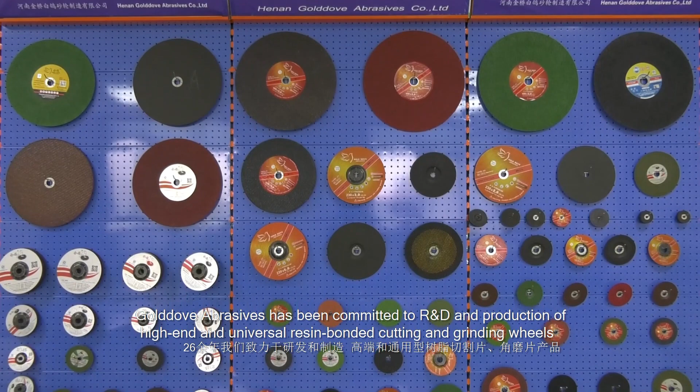Located in Henan, the manufacturing center of abrasive products in China, Golddove Abrasives has been committed to R&D and production of high-end and universal resin-bonded cutting and grinding wheels.

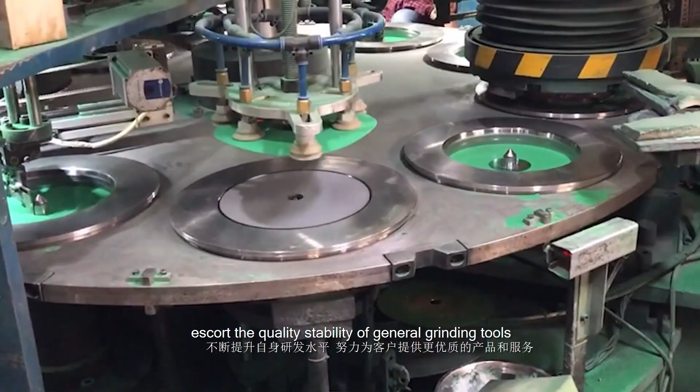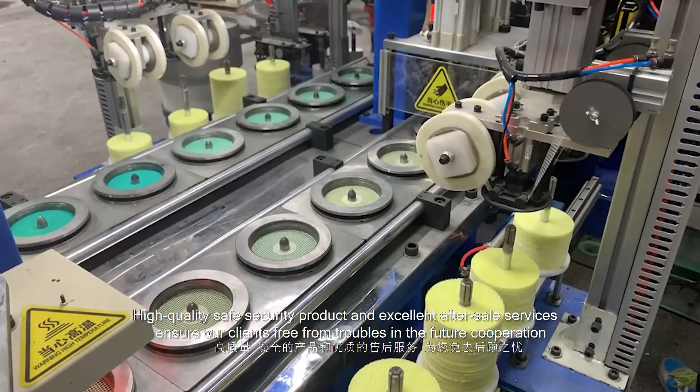Manufacturing experience of more than 26 years and continuously improving research have allowed us to provide better products and services. Quality stability of general grinding tools, high quality, safe products, and excellent after-sales services ensure our clients are free from trouble in future cooperation. Huge manufacturing capability enables us to shorten the production cycle and guarantee the fastest delivery.

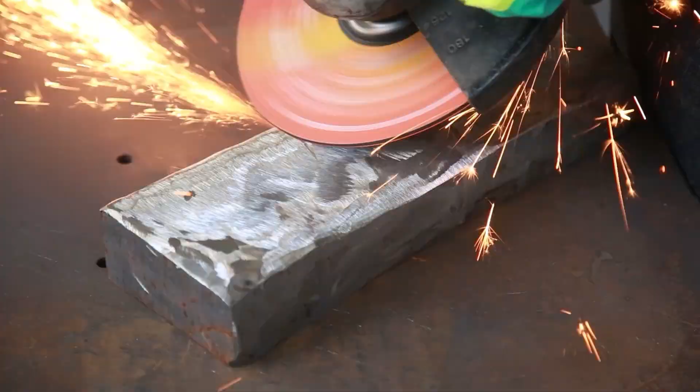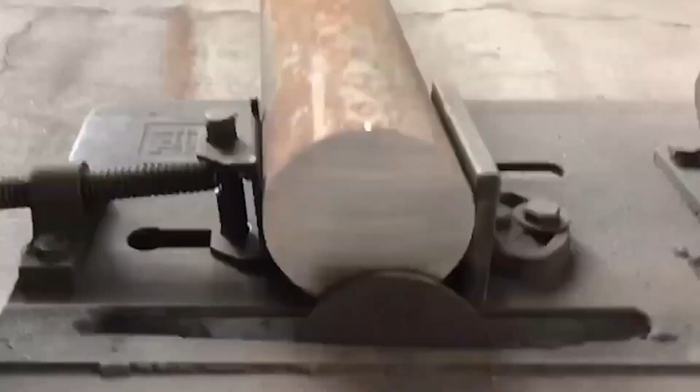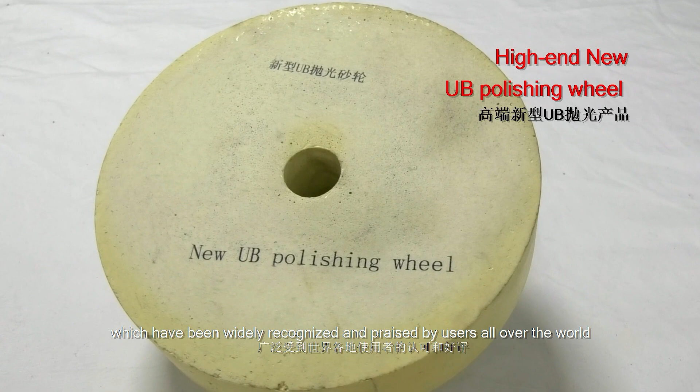More than 26 years of effort in improving product performance and expanding the application of high-end products enabled us to successfully develop specialized abrasive products for stainless steel, copper, aluminum, stone, and other materials, which have been widely recognized and praised by users all over the world.

More than 26 years of experience in export trading helped us accumulate market information on abrasive products from more than 40 countries and provide targeted products and customized services for you, providing products with a target price and quality, enhancing the overall market competitiveness of clients.

Cooperation brings us win-win benefits. Winning makes us stronger. Hand in hand with Golddove Abrasives, building our abrasive wheel empire together.

Okay, welcome back. I believe from the short video you have a general understanding of our company, and now I focus on the product itself. Here in this shelf display we can find the products we make for our own brand, Golddove Abrasives, and on the left and right sides we can find the OEM and ODM brands we make for our customers. I will start with Golddove Abrasives, our own brand.

Here we start from the bigger one. This one is a 16-inch cutting disc with double nets, and this one is a 14-inch cutting disc with double nets, double paper, and fully covered. Below, this is a 9-inch cutting and grinding disc, this is also a 9-inch grinding disc, and this one is a 9-inch cutting disc.

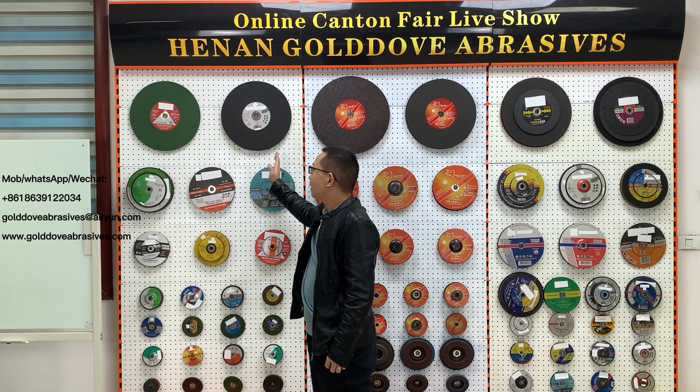On the left side, most of the sizes are similar to here, but these are OEM and ODM brands we make for our customers. Among them, some are for the Southeast Asia market and the Middle East market, different countries. And here are other markets, such as the African markets, the North and South American markets, and also the Eastern Europe market.

All we have here is just part of the brands we make for our customers. Actually, we export our products to almost 50 countries all over the world. So no matter if it's the Southeast Asia market, the Middle East countries, African markets, the Europe market, or the North America and South America markets.

Whichever market you're from, we can make it for you. It's no problem because we have full experience with this. Our factory has almost 30 years of experience in the abrasives industry. So if you have any interest or demand for products, you can just come to us, okay?

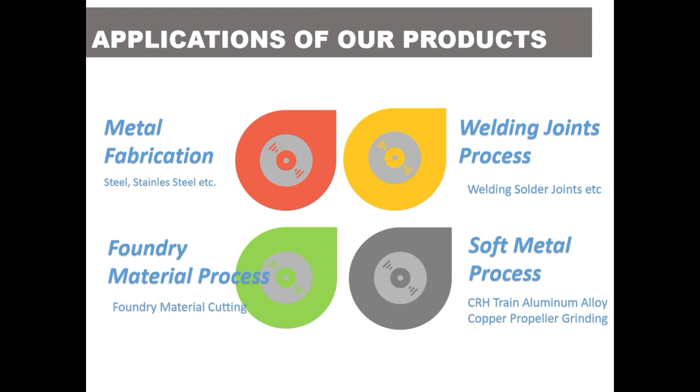Then I will talk about the foundry material process. It's mainly used with the 16-inch cutting disc. And then I will talk about soft metal processing, such as aluminum alloy and copper propeller grinding. I take 2 examples, the CRH train and the copper propeller grinding. First, I talk about metal fabrication.

As you can see at the front, there are different kinds of metal and steel, twisted steel and solid steel. Below, we can find stainless steel, different kinds: stainless solid steel, stainless steel pipe, and other materials. In a word, the abrasive cutting wheel can be used for the fabrication of steel, stainless steel, etc. This is the normal use of the product.

Here we have the welding solder joints process. After welding, we get the welding solder joints, no matter if it's steel or aluminum alloy solder joints. Then we grind with the grinding wheel. The main advantage of our grinding wheel is that when we grind the welding solder joints, there are no burns on the material, and it gives fast and long-life grinding.

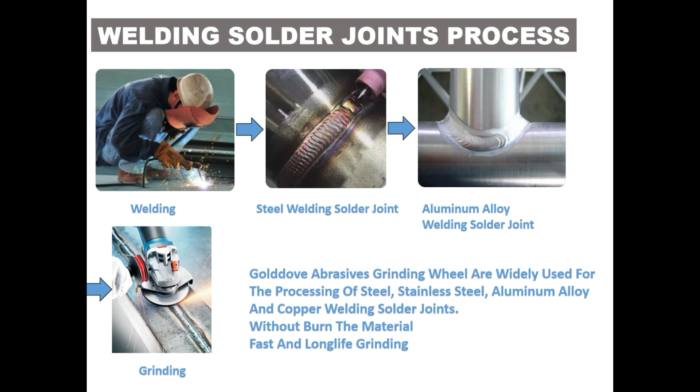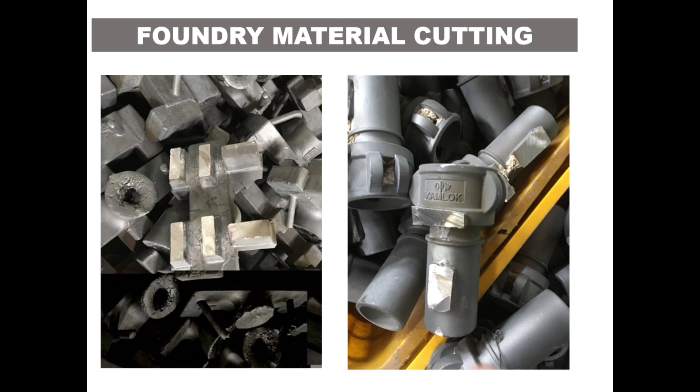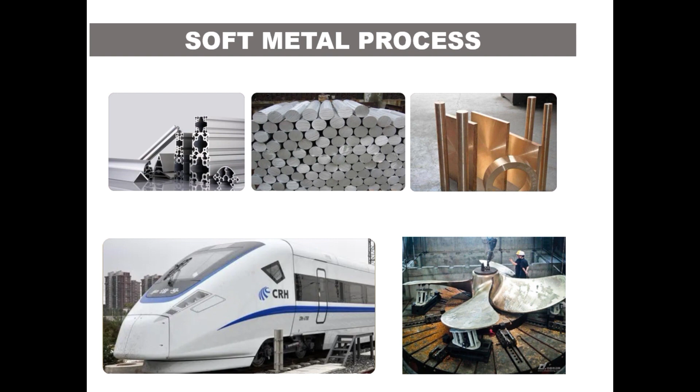Here we can find soft metal processing. This is aluminum alloy material, aluminum solid material, and this is copper material, different kinds of copper. Below we can find the CRH train. The main material of this train is aluminum alloy, so they used our cutting disc and grinding disc to process the aluminum alloy. And here is the copper propeller material, used for boat propellers.

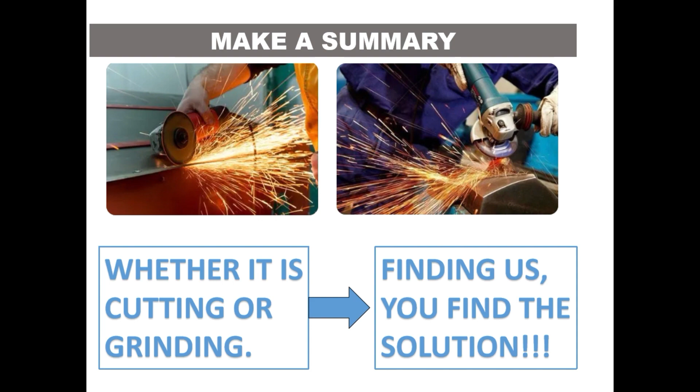So let us make a summary of my PowerPoint: whether it is for cutting or grinding, come to us and you'll find the solution for your product. Okay, my friends, welcome back. So much about the product introduction, okay? I believe every customer who wants to do business with us wants to know the product itself.

You must also want to know about our factory, about our production line, about our quality control system, and also the experiment and the packing process, all of it. Later I will show you around our factory. Me and Daisy will show you around, and you can see our production line. You can see our fully automatic, advanced manufacturing equipment, the baking process and packing process, and also we can see the performance of the experiment in our experiment room. Okay, let's go.

All these are the production equipment of cutting and grinding wheels. Some are semi-automated machines and some are fully automated ones. Each year we upgrade the equipment to improve the performance and save labor costs. If you have visited an abrasive wheel factory before, you must be very familiar with the whole process. Here I will give a brief introduction.

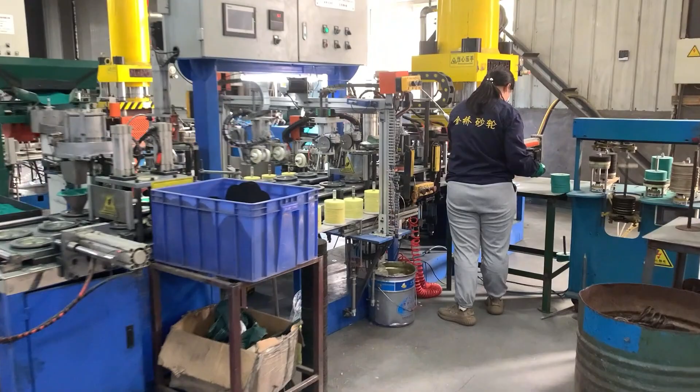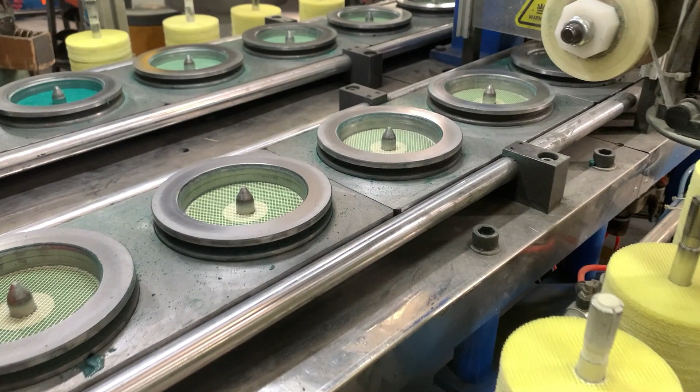This is a 4-inch cutting disc formation process. Briefly speaking, there are 6 steps for the production of cutting discs. This one is for the Southeast Asia market, it's double net. The first step is placing the fiberglass net in the mold and then baking to make it tougher. Next comes the material feeding.

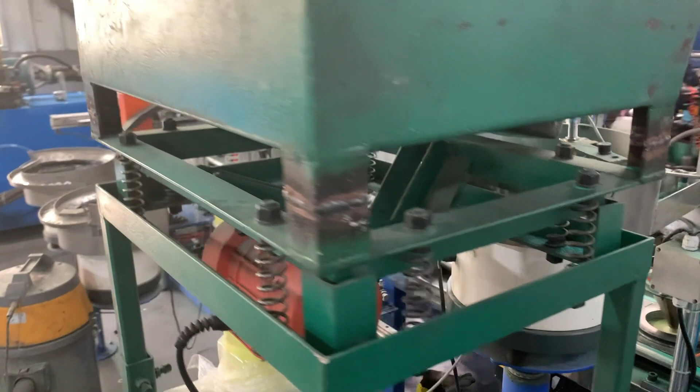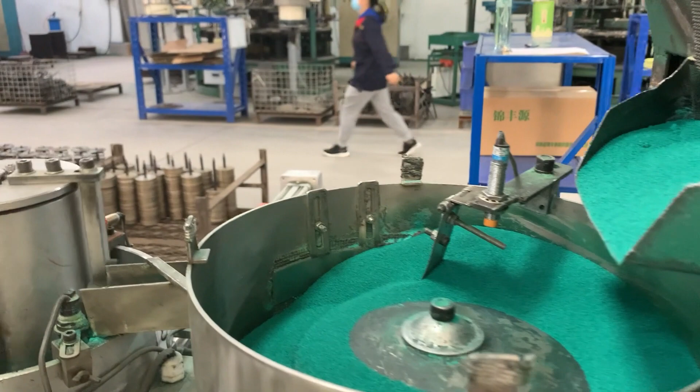You can see this is the sieved raw material. It feels like the sand on the beach, grain by grain, very smooth and comfortable. This is the material feeding. The weight of material fed each time is set in advance, and it varies with the sizes and the manufacturer. It's fully automated.

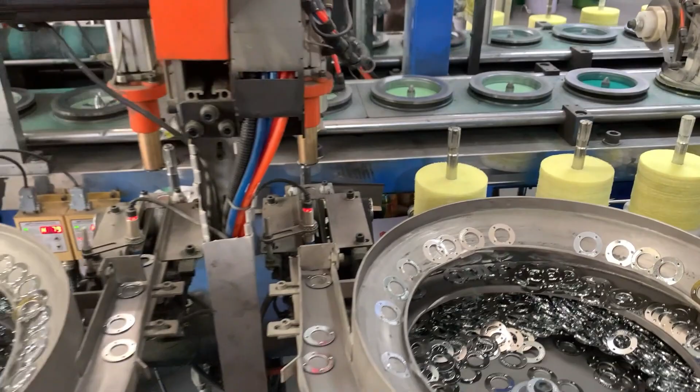And the color is green. It's very popular in Southeast Asian markets, such as India, Malaysia, Myanmar. Here we put another piece of fiberglass mesh on each, and the metal ring in the middle of the cutting disc, and the label. Usually we design the label for our customers for free.

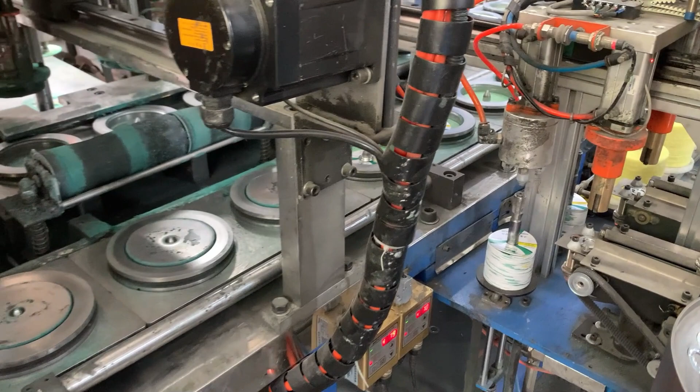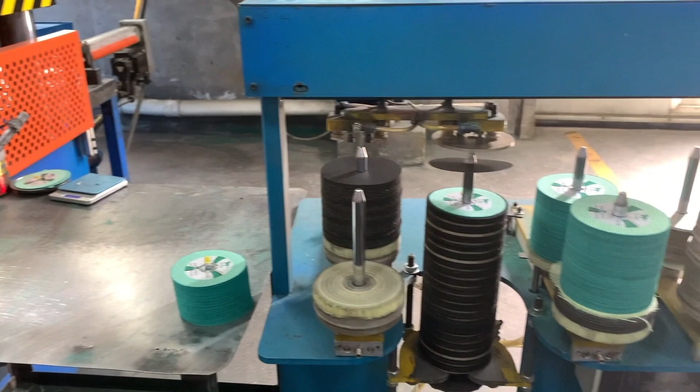Here it will be pressed 2 times. In that area it will be pressed twice. After being pressed 2 times, you can see we've got the semi-finished product. You can see it's very beautiful, green color. And here it's fully automated. We put a certain quantity of cutting discs on a string.

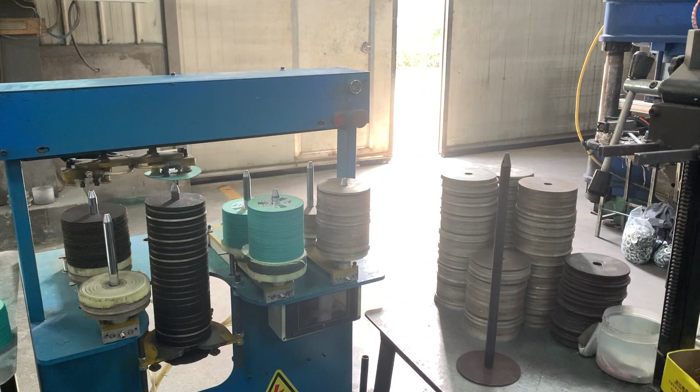Note here, each piece of semi-finished product in our factory is inspected before entering the electrical kiln. For example, the big diameter 7-inch, 9-inch, 15-inch, and 16-inch cutting discs and grinding wheels must pass the static balance detection, and the qualified value is 3. If the static balance value is bigger than that, it will be treated as a defective product and will not go into the electrical kiln for baking.

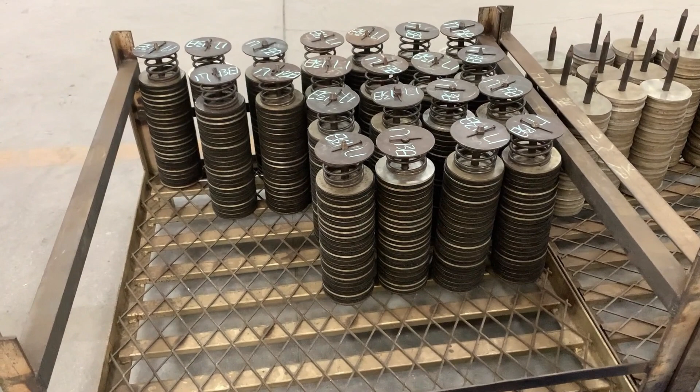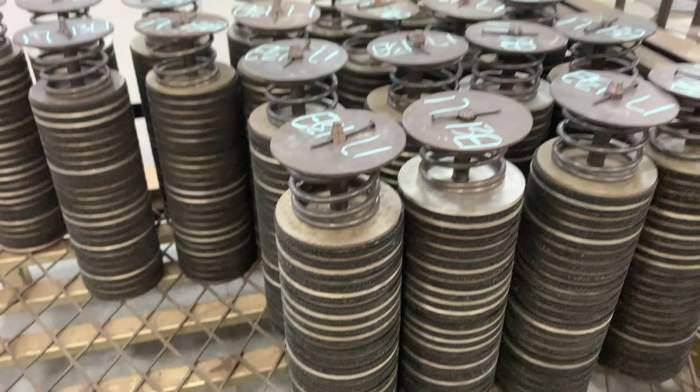And here, look. These cutting discs will be put on a string in a certain quantity, as just mentioned. Look at this one. There are about 200 pieces of cutting disc per string, and the quantity per string is fixed. We do this so that they will be evenly baked in the electrical kiln. Then the quality will be more stable.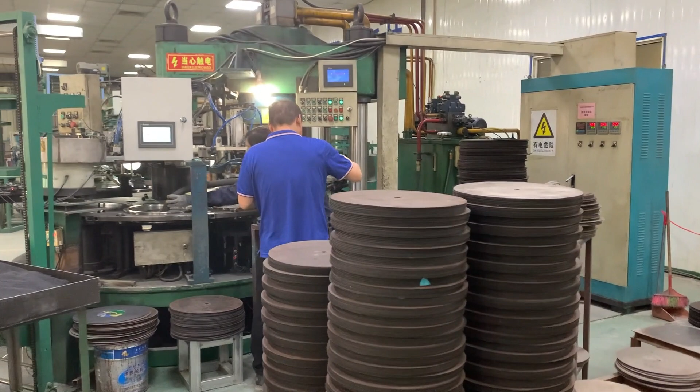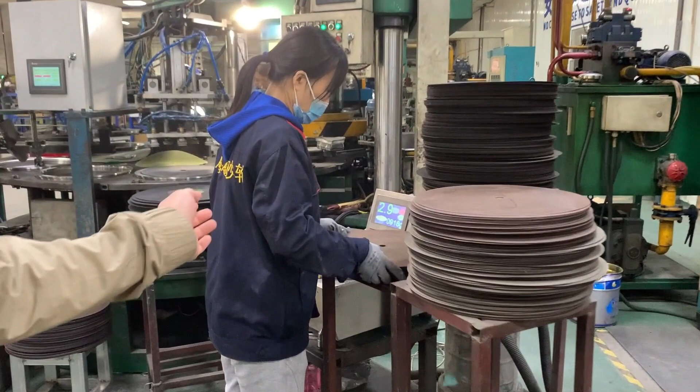All these are the forming machines for the big diameter cutting discs. This is a machine for the 14-inch and 16-inch cutting discs with single net. Here we can see they are checking the static balance. Static balance within 3 grams is a qualified product; otherwise it will be a defective product. Okay, this one is defective. Let's go to the next step, the baking process workshop.

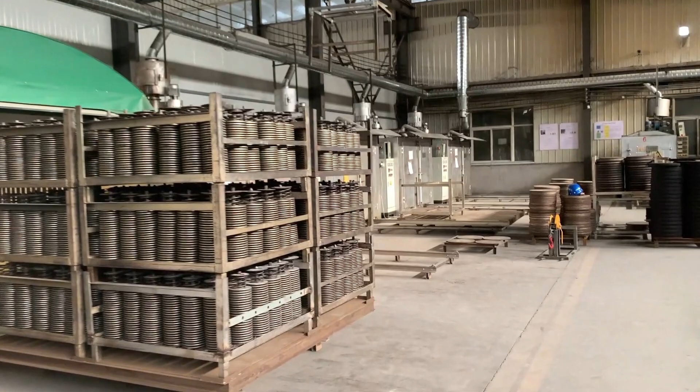Here you can see there are many electrical stoves, each equipped with fully automatic digital control systems. Here is the semi-finished product ready to go into the electrical stove for the baking process. Each electrical stove is equipped with an intelligent temperature control system. The temperature and time are set in advance by our skilled technicians with many years of experience in the abrasives industry.

Besides all these details, we still have many things to pay attention to if we want to produce the right product for our customers, right? Overall, the output of our factory is approximately 400,000 pieces per day. So you don't need to worry about the delivery time and production capacity. We can deliver 10 plus containers every month, so we can get the goods delivered just in time.

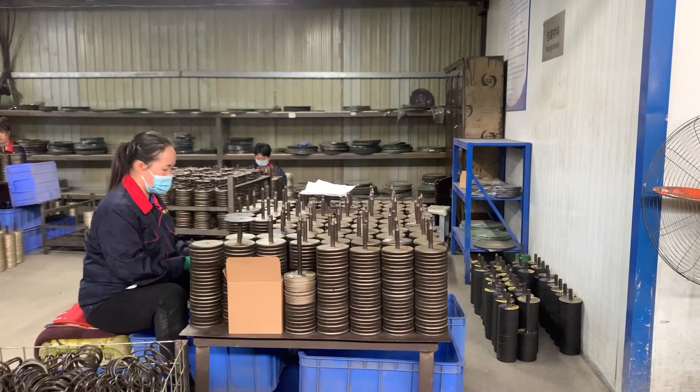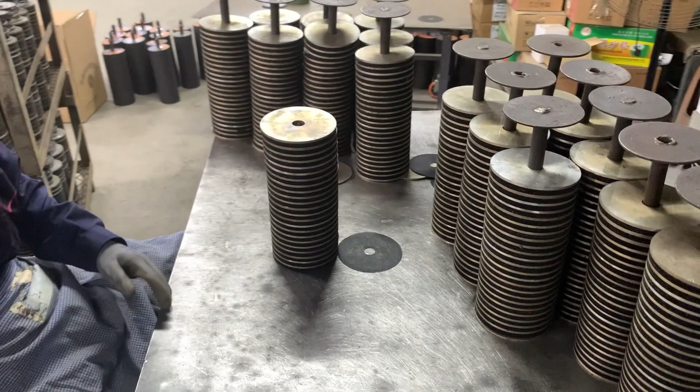Next we will go to the packing areas. The finished product will go through 6 checks. In front of us, we can see the packaging and testing process. The workers are checking and testing the product. In all these holders are the products we produced today, and the packing staff are picking up the cutting discs from the string, and while picking them up, they check the quality.

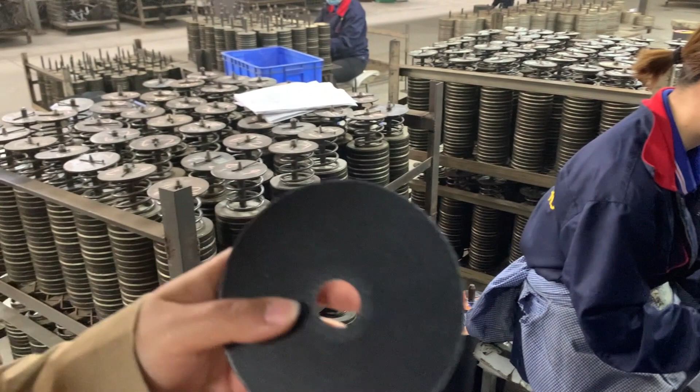For the finished product, we have six times checking, and in this area they will check the appearance. For example, they will check whether it is flat, check whether there are any extra grains on the edge, and check whether the label is broken or not. You can see this one is qualified.

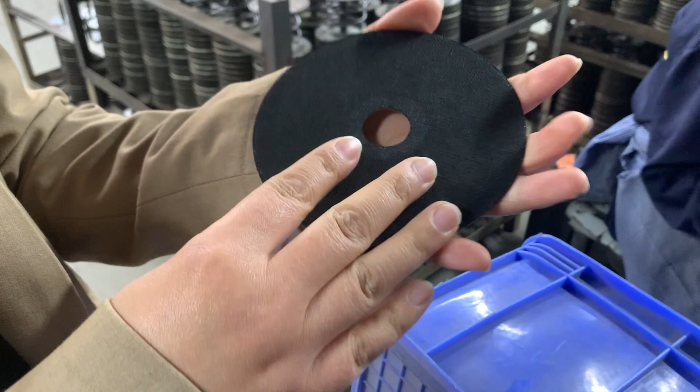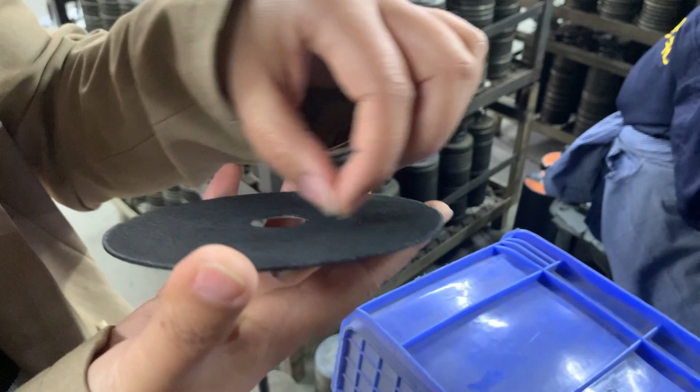And another important checking is they will put dozens of pieces of cutting disc together, and they will check whether there is any gap between each piece of them. And this is the simple checking. And another important checking will be done in the experiment room. Okay, look.

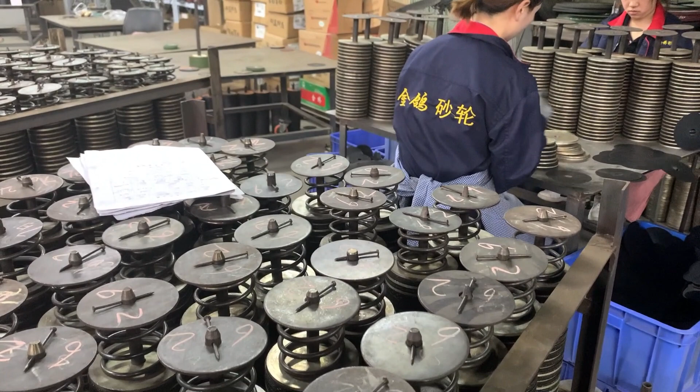Usually, for each holder, we will pick four pieces of cutting disc in the four angles of each holder for the experiment testing and to check the quality stability. Okay, later we will focus on the experiment room. So let's go to the next process, the packing.

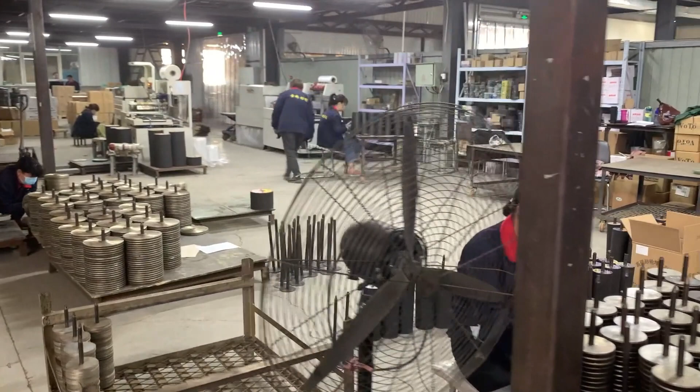Here is the testing process, and you need to test each piece is perfect, and we will make them into 25 pieces per plastic wrap. So every dozen is 25 pieces, and then check the defective product out. And this one is a defective product, and that's why we took it out. Only the qualified product is coming into the packaging process.

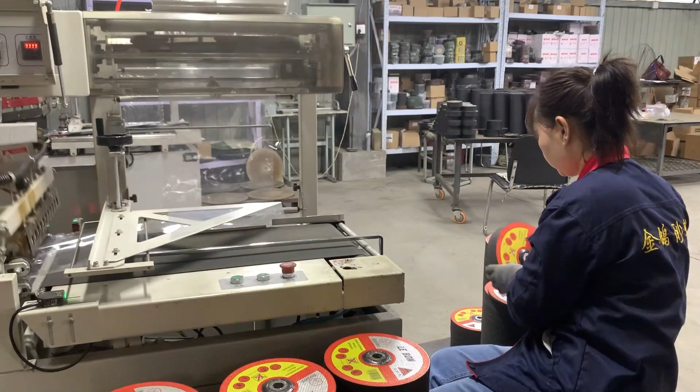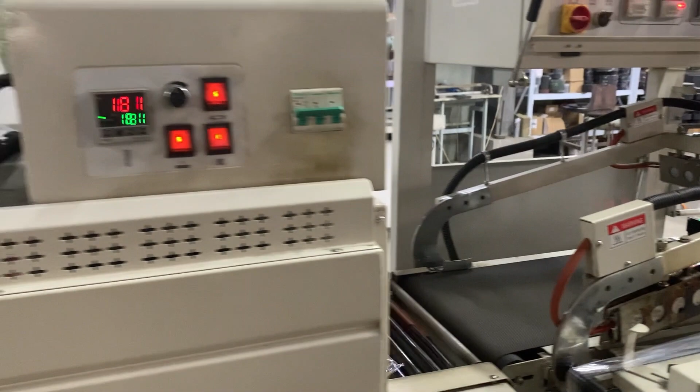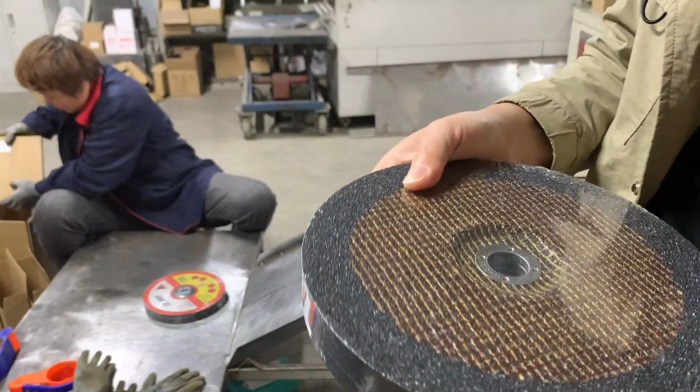This is our plastic wrap machine. So you can see that each five pieces of the 9-inch grinding disc is packed, and then the baking. So this is the finish. As we can see, every five pieces of 9-inch grinding disc is packed in the full plastic wrap. This can keep the moisture off of the grinding disc, so it can keep the performance for a very long time.

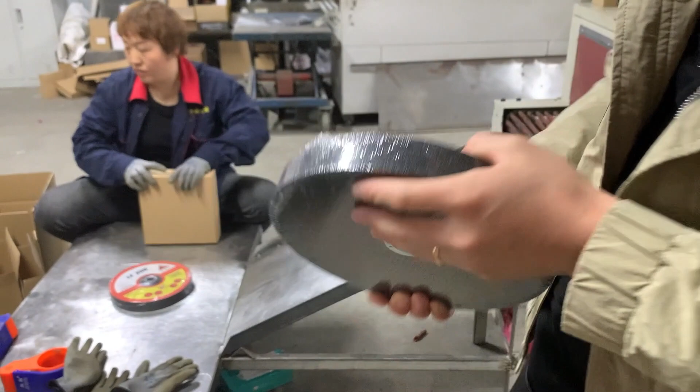And then we come to the packaging workshop. After plastic wrap, we pack them into the inner and outside carton, and then wrap them. As you can see, downstairs is the pallet, the export quality pallet. Some customers prefer the pallet packing. Sometimes we can also sell them by separate cartons.

Yes. And you can see the cartons we have here, for example, this one is a beautiful white carton, and this one is a brown box carton. So any kind of cartons we can make for customers, no problem. And any special requirements by our customers, we can also satisfy. You can just put forward your requirements for the packing and the plastic wrapping, and we will do our best to satisfy your requirements. We can talk about it.

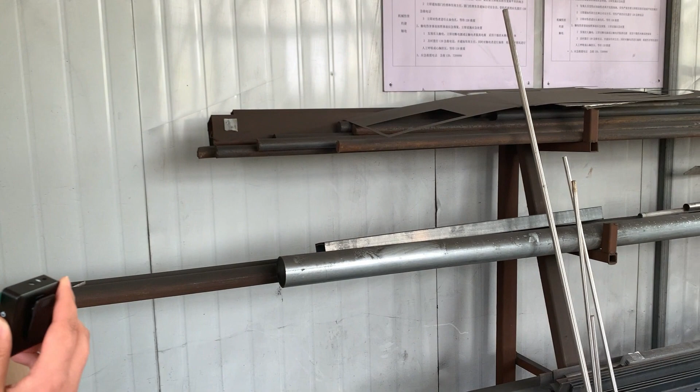Okay, next we'll go to the experiment room. Here we come to our experiment room. It's a very important part in our strict quality control system. Each day we will do many performance tests of our product here. You can see we have all kinds of workpieces and cutting machines. And actually, we just mentioned we will pick four pieces of cutting disc in each holder to do the performance test to check whether the performance is the same, right?

So we have a big pile of work to test each day. It's a very important part in keeping the quality stability. And besides, we will do many sample tests from the customers and the different markets in order to keep improving the quality and to grasp the market trend. And we will make and test the samples based on the customer's requirements until we get the satisfactory product.

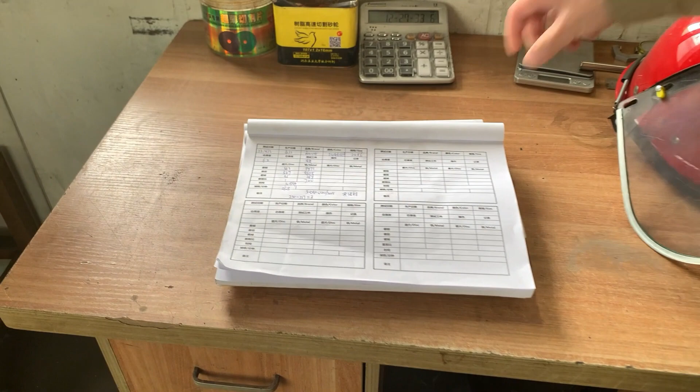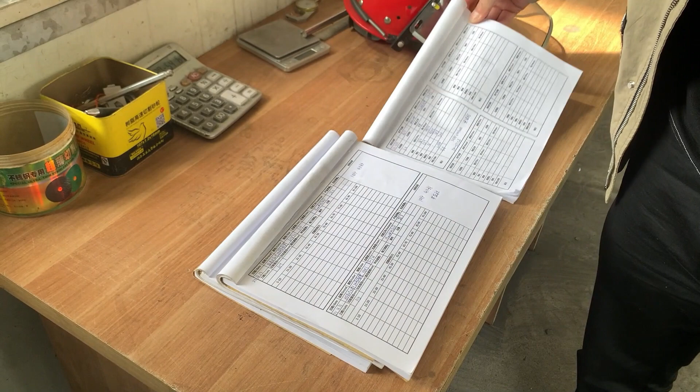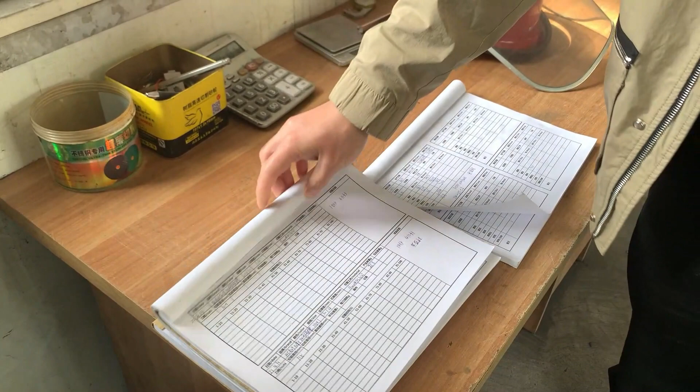And besides, we also have the test records, the test book. As you can see here, every time we do the cutting test, its performance will be recorded as data in the test book. We have divided them: this one is the angle grinder test book, this one is super thin cutting disc, this one is for the angle iron, and also for the big diameter 14-inch and 16-inch cutting disc. Each one is for the convenience of performance and quality checking, and quality improvement.

Each batch of delivered goods will be traced back to this test book. Yes, we can find the corresponding test record data for each batch of the delivered goods. For example, if our customer wants improvement in the last batch of goods, we can find the data here, and we make samples and make the corresponding satisfactory products for them.

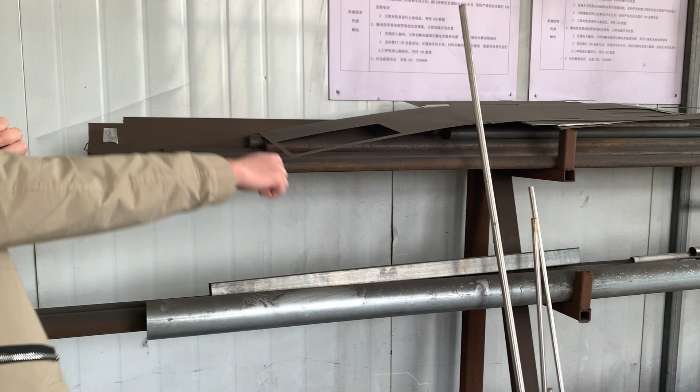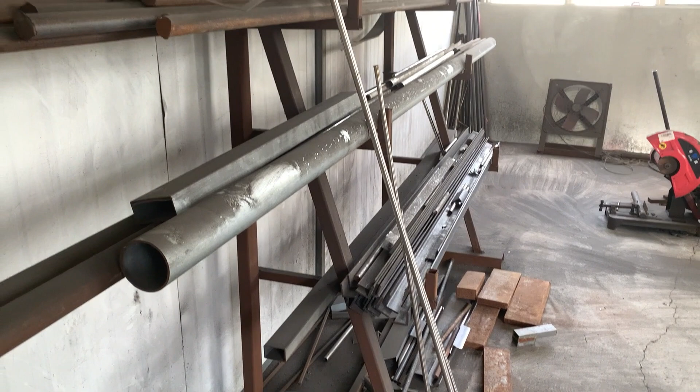And here we can find the testing material. As you can see, this one, 30 millimeter solid steel, is for testing the 14-inch and the 16-inch cutting disc. And this one is the steel pipe, 45 steel pipe, and this one also the steel pipe, also for testing the big diameter, 14-inch and 16-inch.

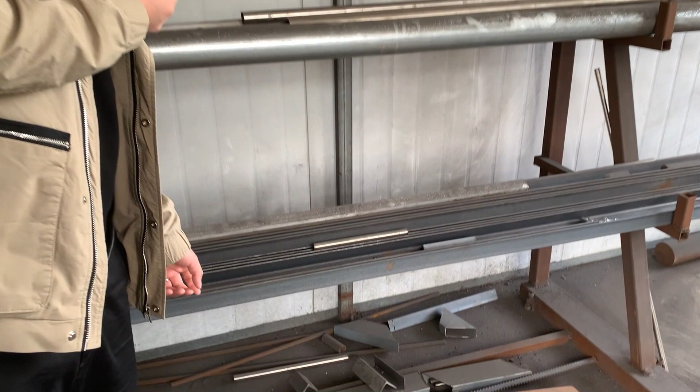And here we can find the 12 millimeter and 16 millimeter stainless steel. It's used mainly for testing the super thin cutting disc, for example, 4-inch, 4.5-inch and 5-inch cutting disc. And besides, we have here the steel sheet, also for testing the super thin cutting disc. And below here, you can find the angle iron, which is used to test the middle size cutting disc, for example, 7-inch and 9-inch cutting disc.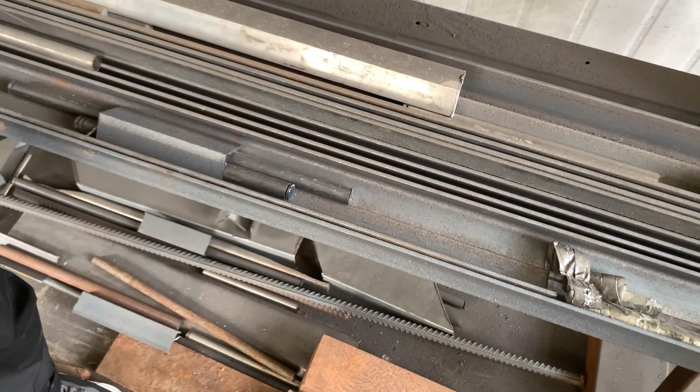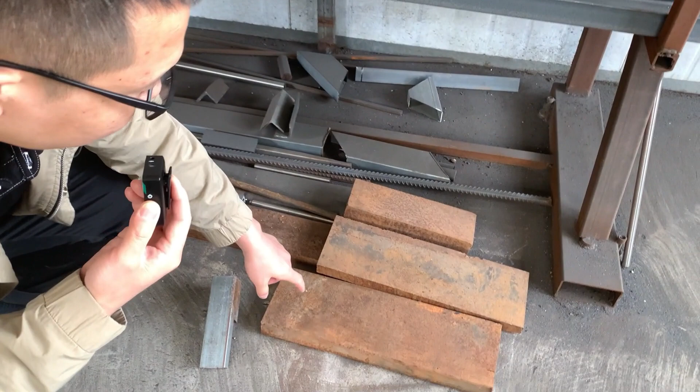And this one is the aluminum material. It's used to test the special use soft metal cutting and grinding disc, for both cutting and grinding tests. And below here is the steel sheet. It's used for testing the grinding wheel. For the grinding wheel, we check carefully the grinding ratio and the grinding performance each minute.

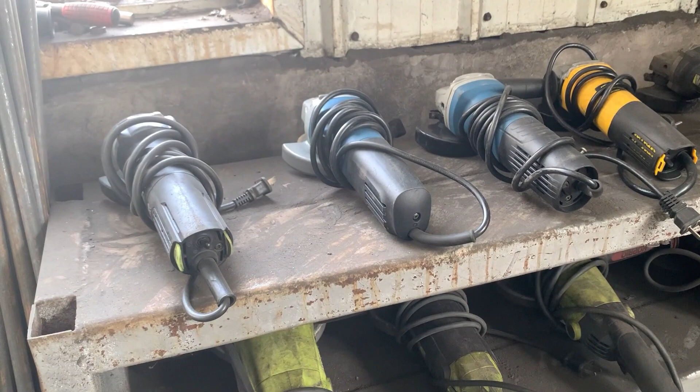And after the cutting material, we see here the angle grinder, the cutting machine. For example, only for the 4-inch cutting disc, we have six angle grinders. As we communicate with our customers, in each market the power of the angle grinder is different. So here they have different power, for example, from 560 watts all the way to 900 watts, even sometimes more than 1,000 watts.

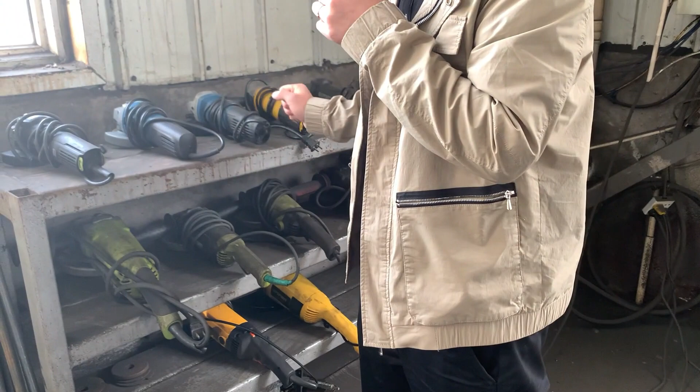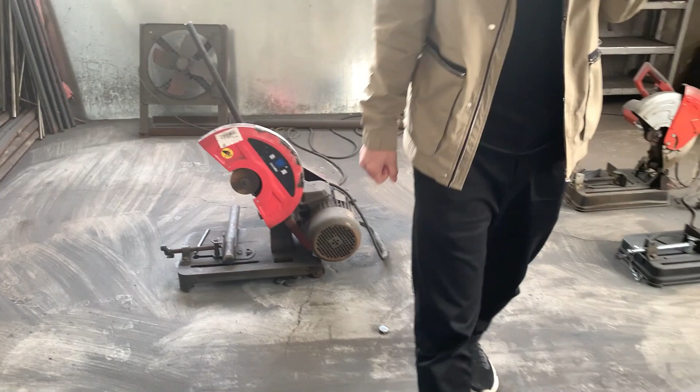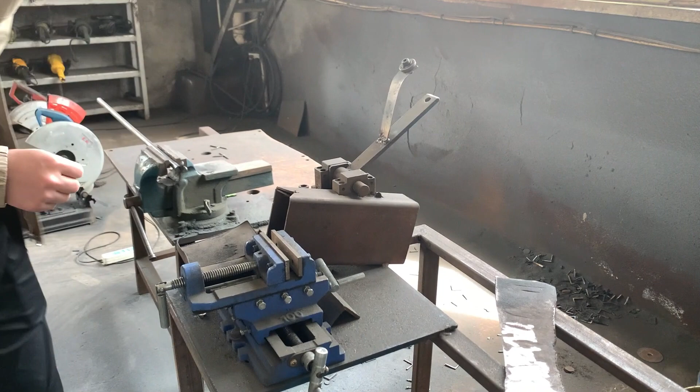Besides the 4-inch, here we can also find the 4.5-inch, 5-inch, 7-inch, and 9-inch angle grinders for testing the different materials, and also for the different markets. And here is a 14-inch cutting machine, also with different power. For example, this one is 2,200 watts, and this one is 2,800 watts. And this one is the 16-inch testing machine. And here is the test desk; this one is for 4-inch, and this one is for any size of the product.

And in the following live streaming, we will do the cutting test. You can see the real performance with your own eyes. So please continue to pay attention to our live streaming. Okay, so much about our cutting experiment room.

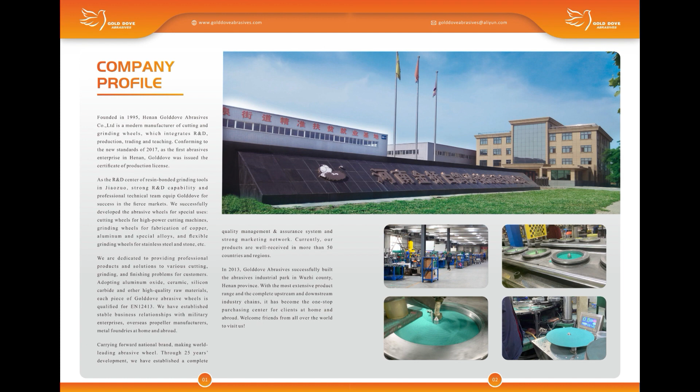Conforming to the new standards of 2017, Golddove was the first abrasives enterprise in Henan to be issued the Certificate of Production License. Last but not least is the Abrasives Industry Park our company established in Wuzhi County, Jiaozuo City, covering 10,000 kinds of products in the abrasives industry. It has become the one-stop purchasing center for foreign clients.

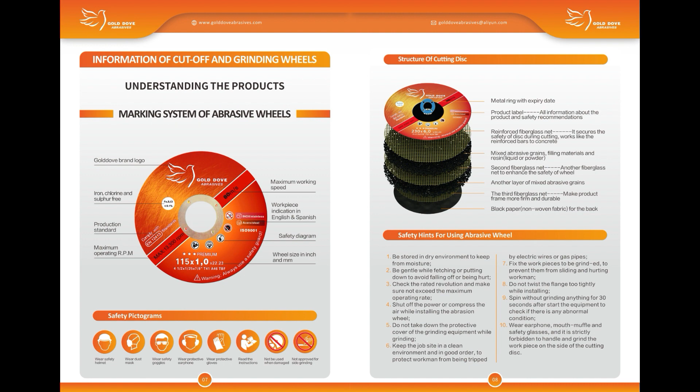On the right, it shows the structure of cutting disc and grinding wheel. The cutting disc and grinding wheel are composed of abrasive grains, reinforced fiberglass net, resin, liquid resin or powder resin, label, and metal ring. Here comes the classification of our product. The cutting disc is divided by its workpiece materials.

This kind of cutting disc is used on handheld angle grinder. And here I must mention the shape. For the cutting disc, there are two kinds of shape, the flat one and depressed center one. This page shows the cutting disc for metal material. The details are the same as the cutting disc for stainless steel.

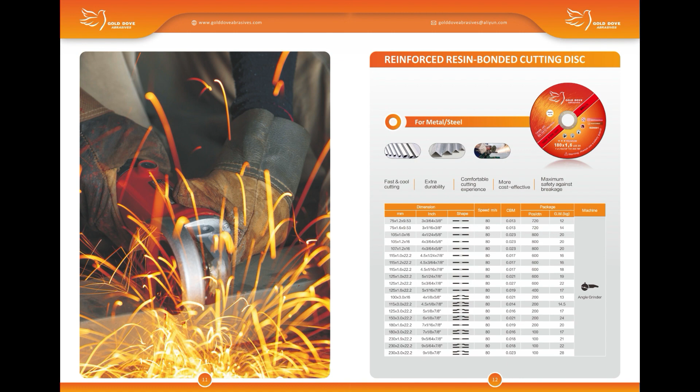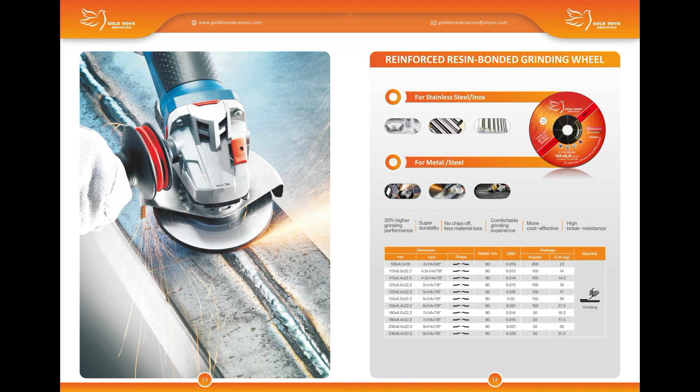Here shows the special use of our cutting disc and grinding wheels for special materials such as aluminum, copper, and non-ferrous metals. We supply customized professional products for military enterprises and propeller manufacturers in foreign markets.

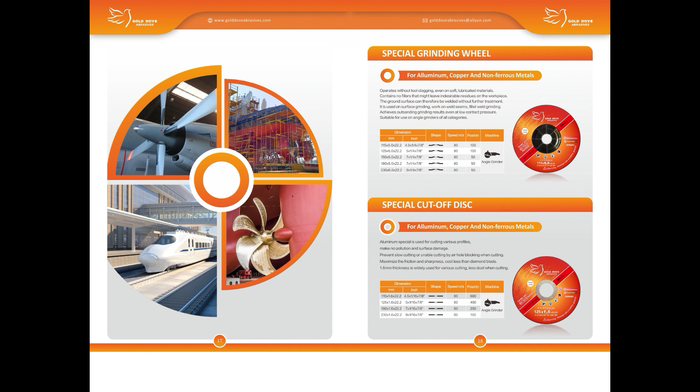Here comes the latest product, flap disc. The main differences lie in the raw material of sandpaper and backing material. The backing material includes fiberglass and plastic, sizes of sandpaper and shape, T27, T29. Most importantly, the grades, including 40, 60, 80, even 400. And different colors indicate different raw materials of sandpaper.

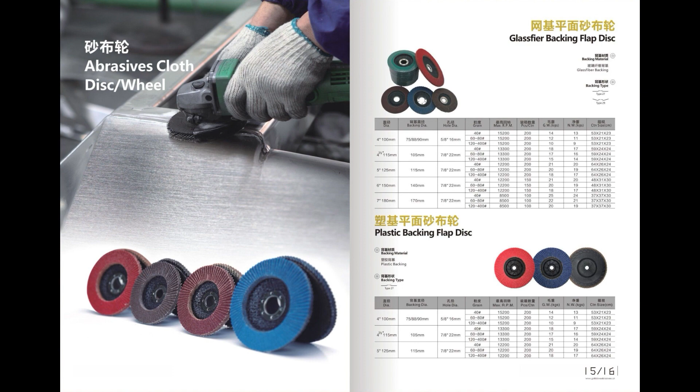This page shows the flexible disc. It's another kind of flap disc. This type of backing shape is T27. The difference mainly lies in the core material, metal core and plastic core.